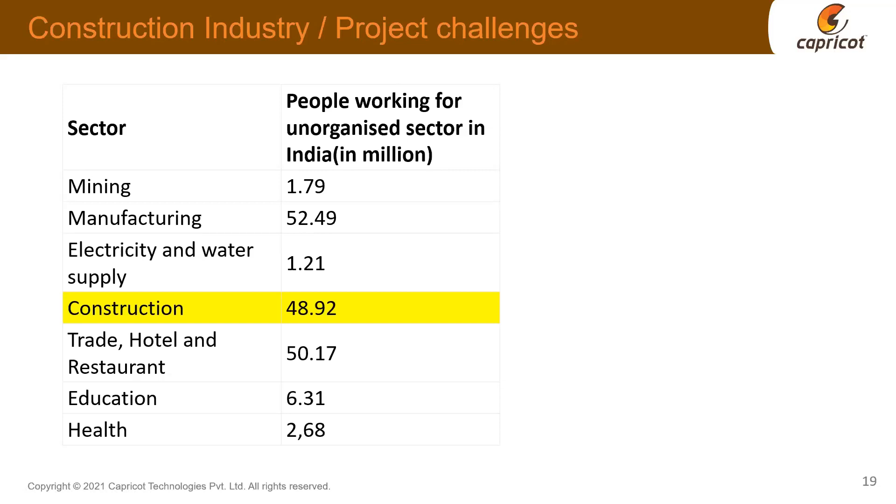Next, we still feel good when we deploy small time petty contractors. We try to achieve economies of scale. How do we do it? We provide them the free issue material and recover that material cost through them.

As project managers, we still have the mental block, sticking to the traditional way of working. If you can use the common data environment, CDE, to maintain thousands of drawings used in a particular project, why do we require a drawing register maintained separately by each stakeholder, whether it is design team, execution team, or contractor? Further, be it design development, procurement, contract management, or project monitoring in the form of cost monitoring, cash flows, schedule monitoring, DPR, daily progress reports, daily manpower report, pour cards for concreting, formats and checklists before, during, and after construction, and records of minutes of meeting - we are still resorting to simple Excel sheets or hard prints for documentation.

Believe you me, we still have the system of advanced drawings, followed with an infinite number of GFCs, maybe up to GFC 1 to GFC 20. What happens is an advanced copy of the drawing is sent to the site. The most experienced man sitting at the site will give his consent, and everyone will follow what he says.

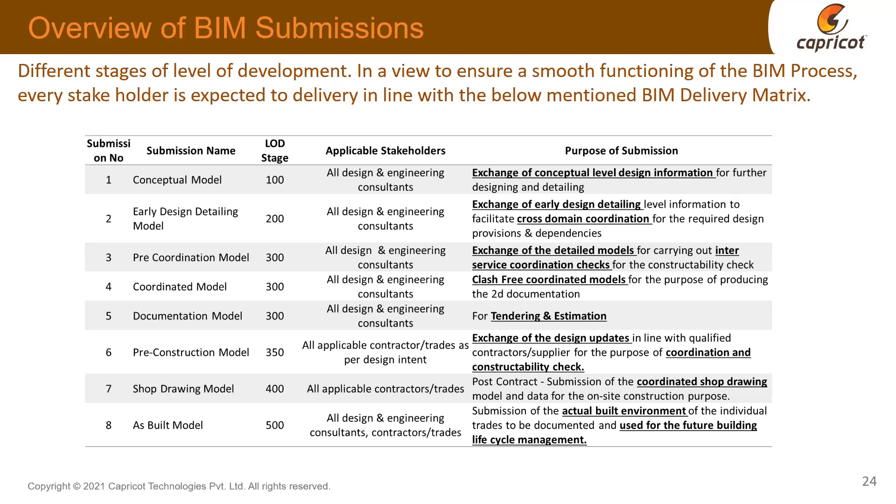Moving on further, now let's talk about digitalization in the construction industry.

For a builder or a reseller, now you can let your prospects explore your inventory digitally and shortlist the ideal flat for them using a plethora of filters - second floor or 22nd floor, east facing or west facing, 2 BHK or 3 BHK, finished or raw. Let them handpick their dream home.

Pallavi ma'am, can I click the link? You can share your screen, I'll stop sharing. All right, okay, yes. I have stopped the sharing, you can share your screen now. Sure.

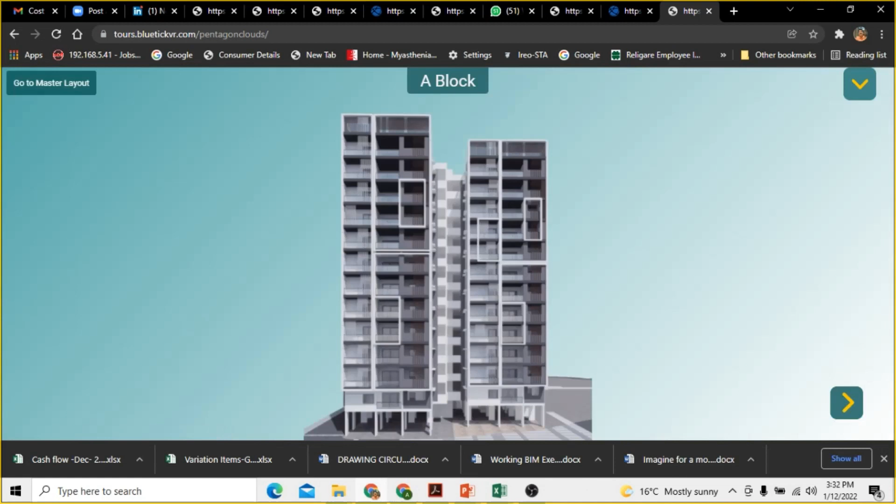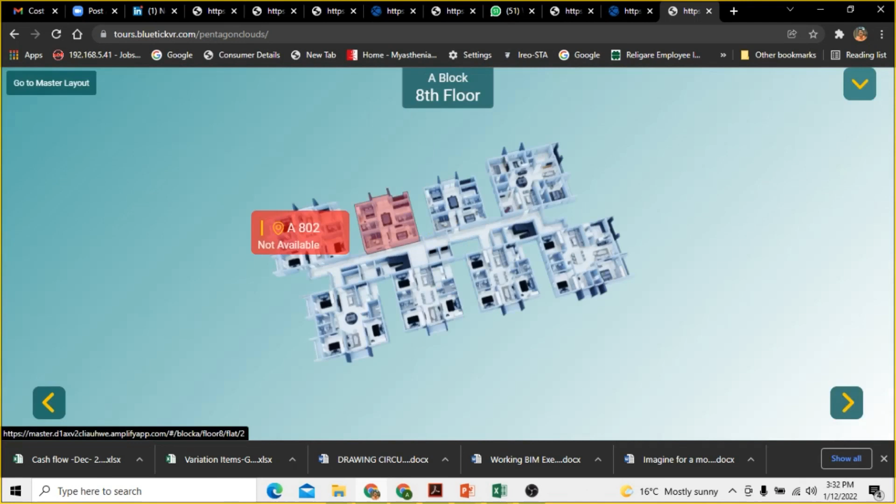So what I'll do is click on one of them. Let's say I want to see the 9th floor - this is a typical plate on the 9th floor. I see everything is red in it, so I'll move back to the master layout and check another floor, let's say the 8th floor. Here I see one of the blocks is having green, so there is an availability.

So this is the layout, this is a unit plan. I can have the virtual tour of the same, I can see the isometric view of the same. So I move back and take the virtual tour. I can see it here.

And now I can further compare with some other similar available unit as well. I add to compare - I click add to compare, and then I move out of the screen.

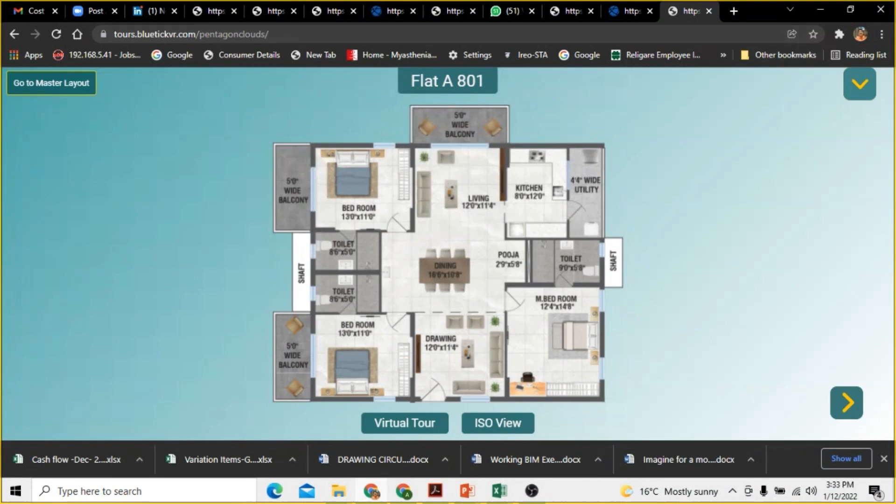And again, I go to the master layout, I click some other tower, and again let's say I want to see the 7th floor. I see something is available here. Again I press this button, add to compare. Now there are two things to compare.

It's the same thing as we do on Amazon or Flipkart - we compare items, add to the list and then compare. So we see this is the first flat, flat number A801, and another flat. On the bottom we see the different specifications - both are west facing, plinth area is 1364, plinth area is 1246, and there are other parameters as well.

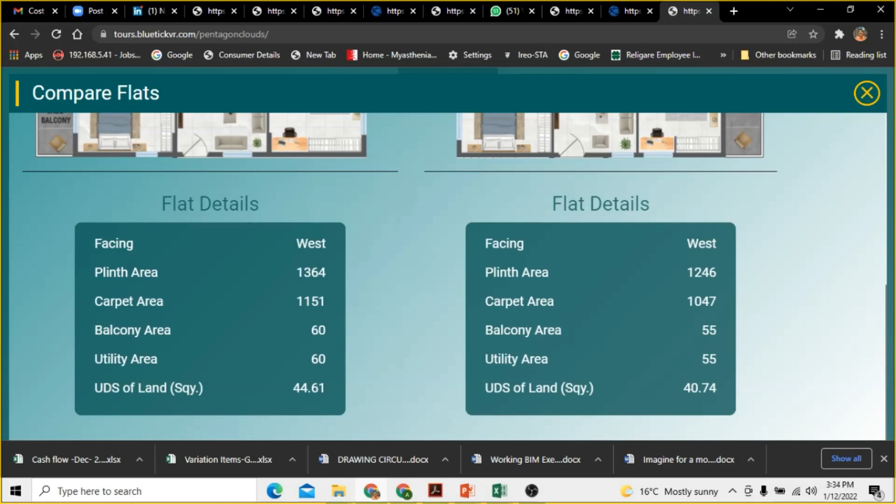So in this way we'll boost our customer engagement manifold. Once shortlisted, you can put the flats to comparison side by side and make the booking decisions faster. So next I'll move on back to the PPT.

Now let's see the difference between the traditional cost management and Autodesk Construction Cloud.